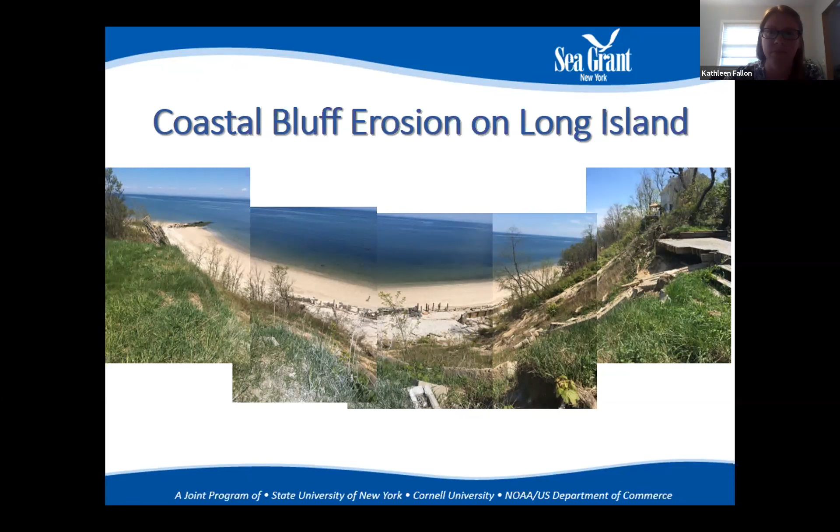Long Island is characterized by bluffs on the North Shore and in Montauk, and both are currently eroding at various rates. Along the North Shore, our bluff erosion tends to be episodic, happening at various rates usually related to storm events, whereas out in Montauk, where we have continuous wave action, the bluff erosion is a lot more continuous, going at different rates.

So there are things that we have done in order to prevent and mitigate bluff erosion. These two images show the plantings and terracing that has been done - these are more natural, nature-based features. In the first picture I showed you, you saw a bluff bulkhead at the toe of the bluff, so there are also more gray infrastructure options. However, we see here that even though you can put up measures to mitigate the erosion, if your neighboring properties are not protected, you might still wind up with issues. So bluff erosion and mitigation measures really need to be a continuous option.

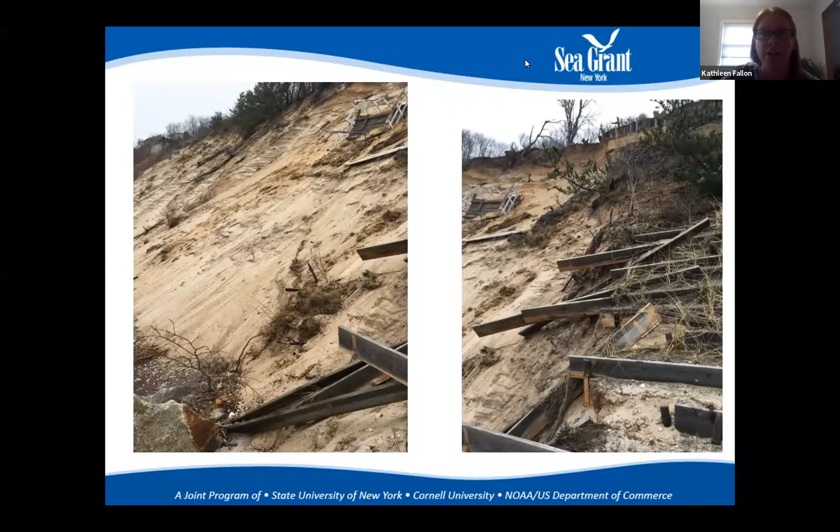And then I'm going to leave that there, and I'm going to let Roy take it over.

Sorry, I had to unmute there. Thank you, Kathleen. Can everyone see? Well, that's what we're trying to avoid. So can everybody see that? Yes, Roy, you're good.

In the Great Lakes, we have really similar issues to what you have down in Long Island. Unfortunately, it's not as predictable as the tides would make it out to be.

We have bluffs in pretty much every Great Lakes county to an extent. They're not the same bluffs in every county, and they tend to vary, especially on the eastern shore of Lake Ontario, or the eroding dunes along southern Jefferson County and Oswego County, Sandy Island Dune Complex, where we're seeing the most bluff erosion there right now. However, on the southern shore, we have significant truncated drumlins left over from the last glacial era in New York State, and we kind of see the alternating drumlin wetland complex throughout the area.

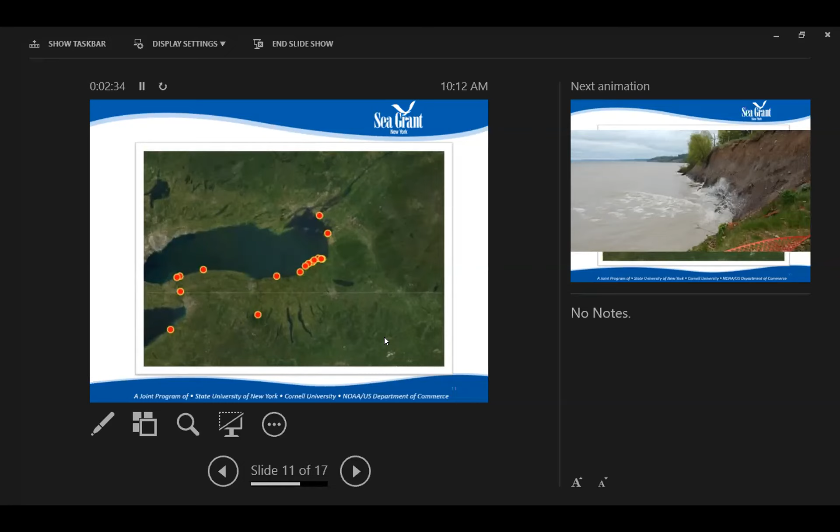And just recently, we've started getting more reports from Lake Erie because the lake levels just aren't going down to the point where people can do a lot of work on their properties.

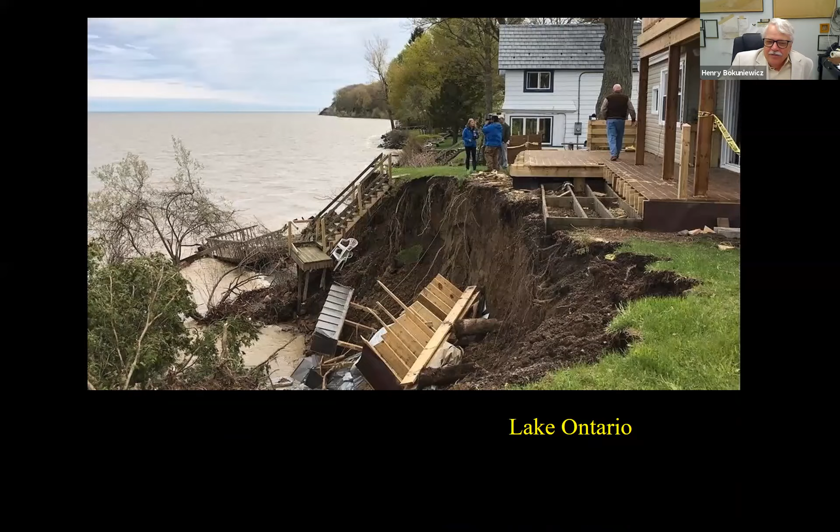The bluffs on the Great Lakes and around Long Island do look an awfully lot alike, and it's tempting to say that they're all the same, they're all pretty much similar. And it's even more tempting when the impacts are identical. You see this in the Great Lakes and you see this on Long Island. It doesn't take much imagination to relate the two in terms of the processes.

On the other hand, you also see things like this. These are the Chimney Bluffs in Lake Ontario, something that's very different, and makes you think, well, there's something unique going on here. Part of this is a problem in compositional material that forms the bluffs. On Long Island, many of the bluffs have a foundation of Cretaceous sand and gravel, very old material that has then been modified by the last glaciation. Around the Great Lakes, as Roy was saying, much of the loose material of the bluffs is composed entirely of glacial till, more recent material, different composition, and leads to a different behavior.

When Ali talks about the research, these compositional differences are one of the elements that we're trying to incorporate into our understanding of bluff erosion.

Regardless, the problem is very much the same, or can be viewed as the same. All of these sections of shoreline are subject to the Coastal Erosion Hazard Area line, in recognition by the state that these are hazardous locations where the state has some jurisdiction in regulating. So there's this similarity that extends across areas both in the Great Lakes and on Long Island.

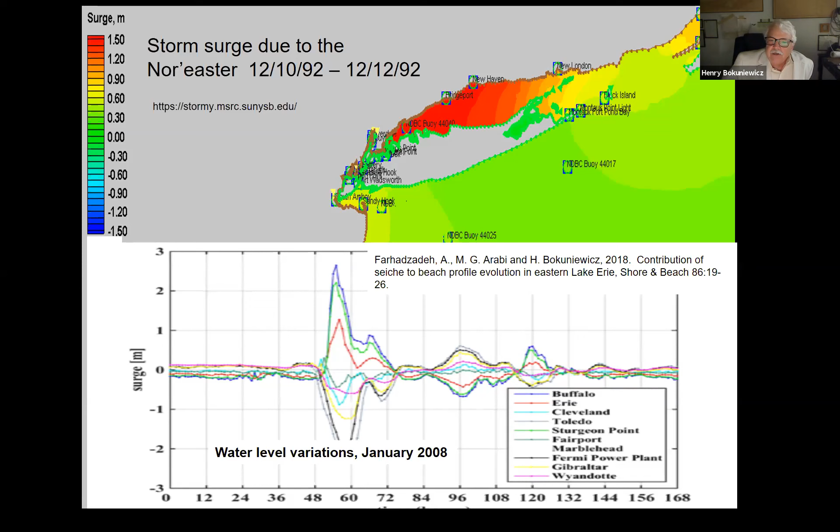On the Great Lakes, Ali has done some work on this, where the storms may not drive in ocean water like it does on Long Island Sound, but it tilts the water level and can raise it several meters on the coastline. In both cases, this drowns the beach and allows the bluffs to be attacked by waves.

In the Great Lakes, as Roy pointed out, there are similar sorts of changes due to water level fluctuations from precipitation and the input and output of water into the different lakes. Changes in lake level produce these long-term stresses on the system, which again can drown the beach, allow the waves to progress directly over the beach, and undermine the bluffs.

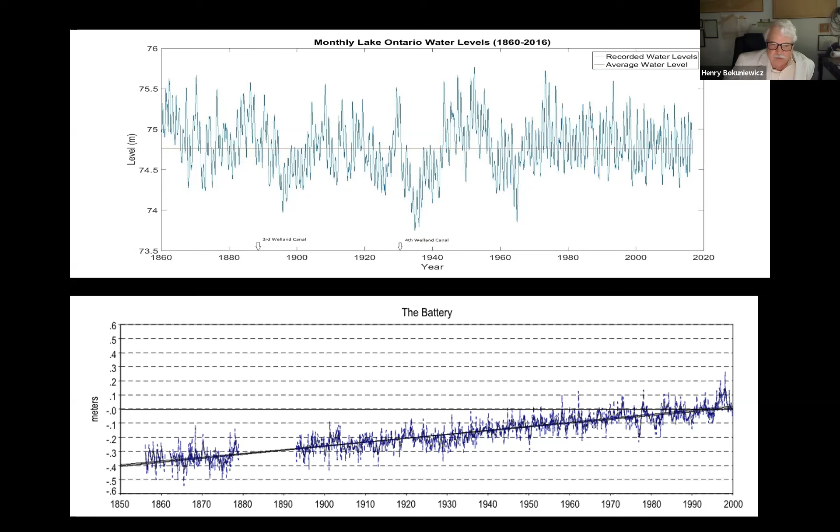Ali will talk more about the details of this process as we go further. But waves are the most likely suspects—we can see this happening. People who live along the shore can see this during a storm and have a good sense of how dangerous that wave attack can be. It's certainly one of the obvious and primary drivers of this.

But the waves have kind of a silent partner—something that aids and abets them, an invisible factor we don't really recognize, due to groundwater, or the subterranean water content of the bluff material. On Long Island and elsewhere, groundwater levels can actually undermine and sap the bluffs, weakening them even without the waves. The water content in the soil makes a difference as to how resilient or resistant it is to erosion and large-scale collapse.

So another element of the research project we're pursuing is to look at the influence of water as well as composition on the susceptibility of these coastal features to erosion.

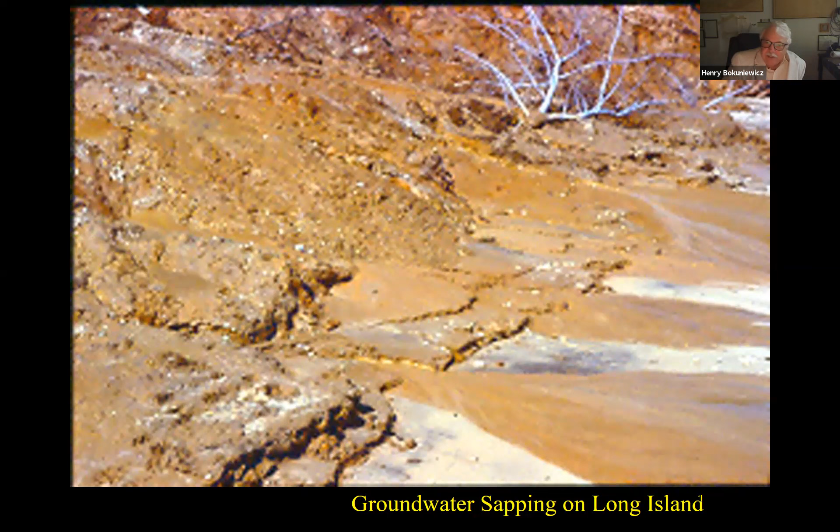With that introduction, I'm going to turn it over to Ali, who will give more details on what we're planning, what we've recently done, and what we're planning to do in the near future. Hopefully we can get some input as to how this relates to individual problems at sites around both the Great Lakes and Long Island, as well as common issues that plague these communities. So I'm going to stop there, and Ali, it's up to you.

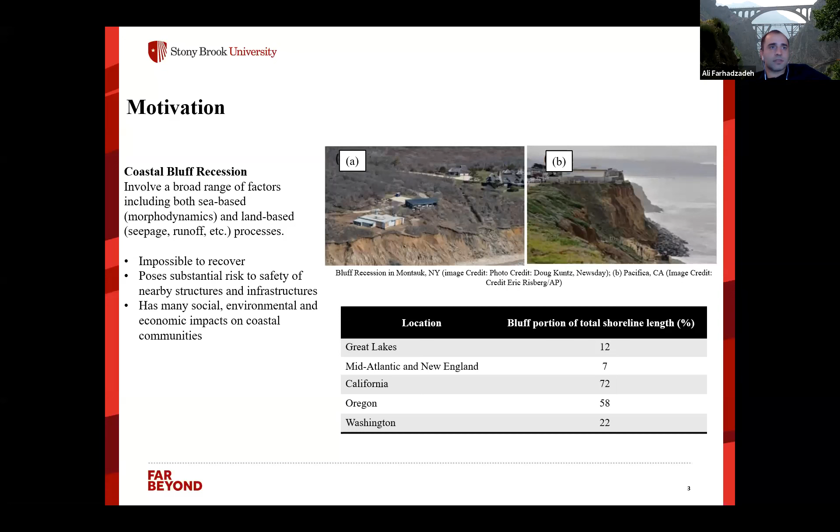Again, we are trying to understand, at least in part, what causes bluff erosion and how we can control it. We're not going to be able to stop it, but at least manage it.

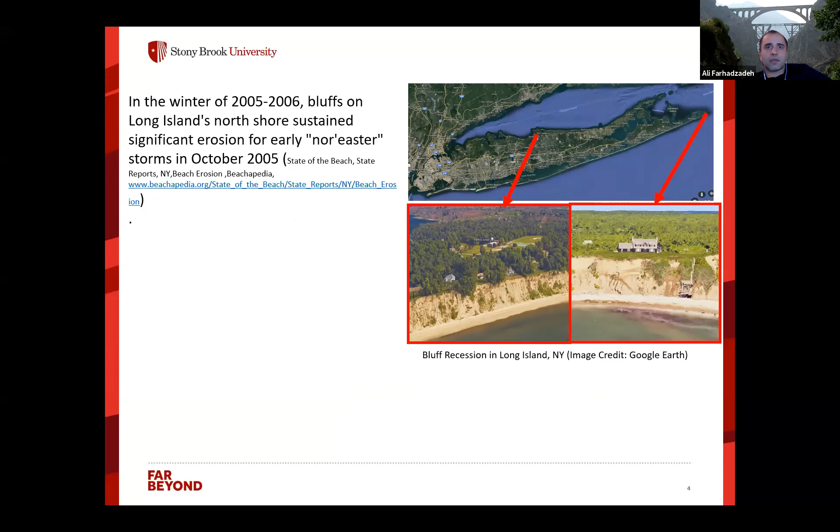There are a lot of reports out there on the erosion of bluffs in Long Island and in the Great Lakes. You can see some of the statistics here. I'm not going to go into that.

A video I found on YouTube, and I'm going to share it with you.

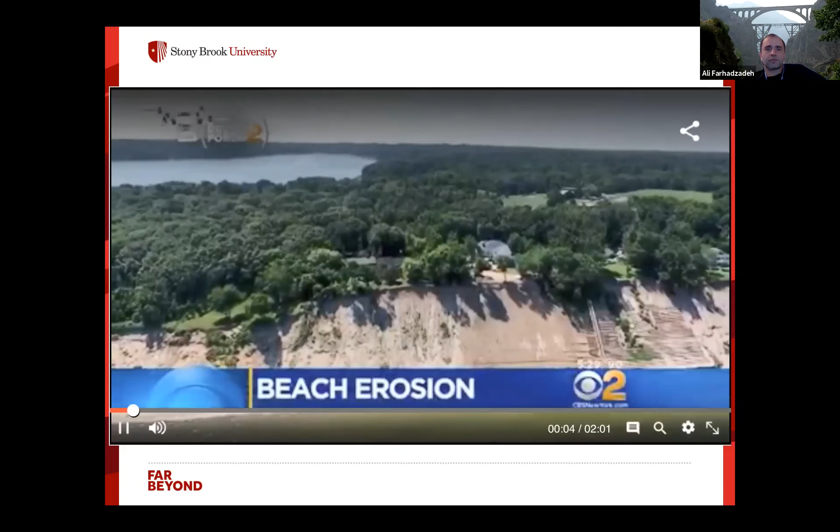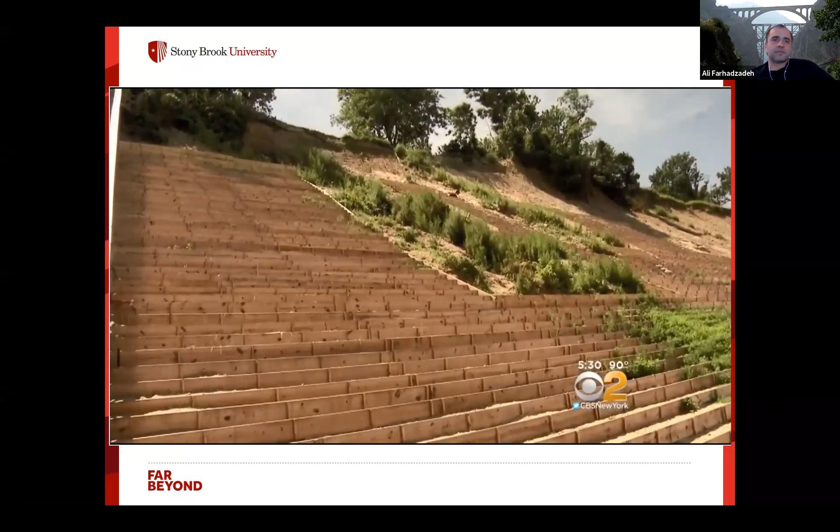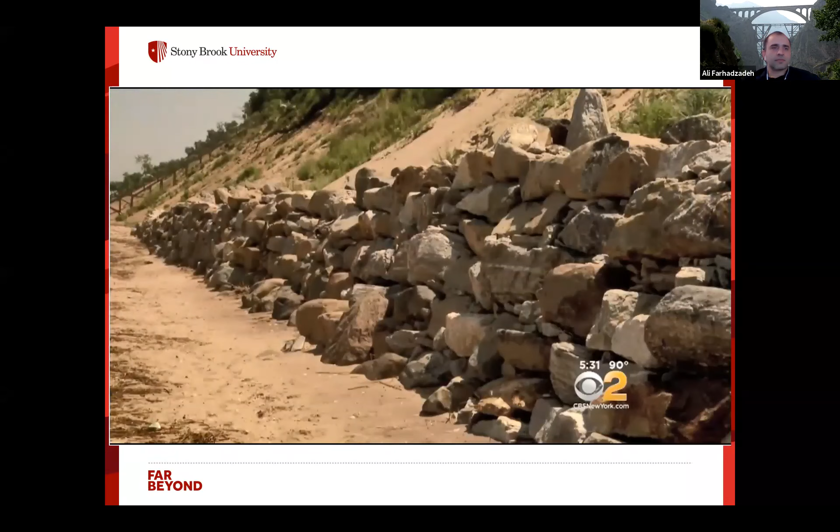Homes are breathtaking, a 100-foot straight drop to Long Island Sound. But the incline is getting more precarious. Peter Scott loses 2 feet of backyard to erosion every year. We should be allowed to build these walls. With DEC and village permission, he had this massive terraced wall built, footed with huge boulders to stave off erosion, protect his home and property. We should be able to protect it. We're not taking away from anybody. There's no way they can say that the beach is being destroyed by what we're doing. But down the block, this wall may have to come down. The owner did not get village approval first. It was an audacious act of unlawfulness. The violation adding fuel to an already heated issue. Some experts argue seawalls to shore up private homes and bluffs are thinning out public beaches downstream by interrupting the natural flow of sand. Nancy Featherston claims seawalls are making her community's private beach disappear. You will destroy the beaches. You're stopping the nourishment of sand that created them. The problem's not just here in Nissequogue. Across Suffolk County's North Shore, homes are in danger and beaches are being swallowed by dramatic erosion. A statewide master plan is not always implemented uniformly. As this home teeters on the cliffs, the owner, who declined comment, may now have to tear down this six-figure seawall. A Bluff Road neighbor's seawall is under construction. We're preserving the beach, we're preserving the coastline. If you go to Connecticut, it's all rock walls along the coast to protect it. 2.5-ton boulders may have to be moved or even removed. The village hasn't ruled yet. In Nissequogue, Long Island, Carolyn Gusoff, CBS 2 News. Now an attorney for the...

All right, so it looks like everybody's right, so we don't really know. But I think there's some truth to everybody's statement. The bluffs supply sediment to the beach, but there are also some hazards to the infrastructure that they need to worry about. So that's understandable.

On Long Island, most bluffs are mainly sandy with some silt and clay, typically around 70–80% sand, 20–30% fine grain material. On Great Lakes, we have mostly till bluffs with a bit of sand. So it's basically two ends of the spectrum in terms of composition, Long Island versus Great Lakes.

The forcing mechanism, as Henry mentioned, is different. The South Shore is different from the North Shore of Long Island, but in the Great Lakes, seiche, freeze and thaw, precipitation, and even ice impact are the main erosion drivers. Lake level is managed to some extent, but we've done work on seiche, and we see that if the trend of warmer winters continues with less ice coverage, for instance on Lake Erie, we expect more seiching and more erosion in the future.

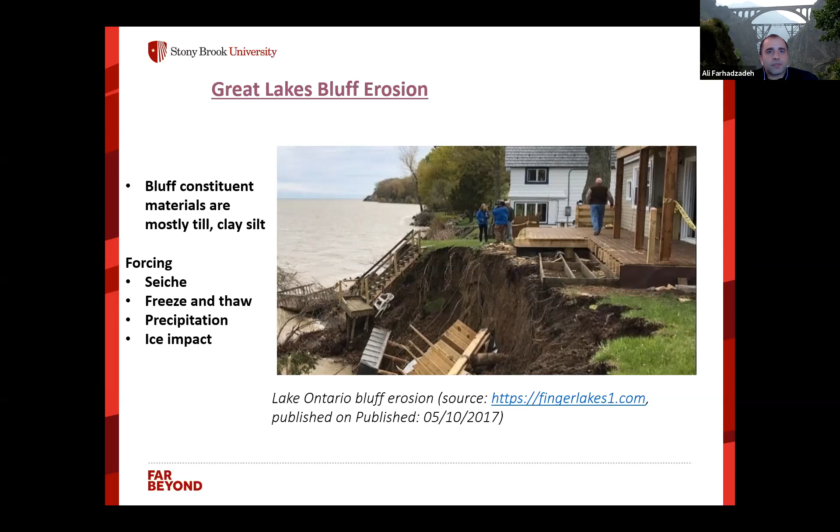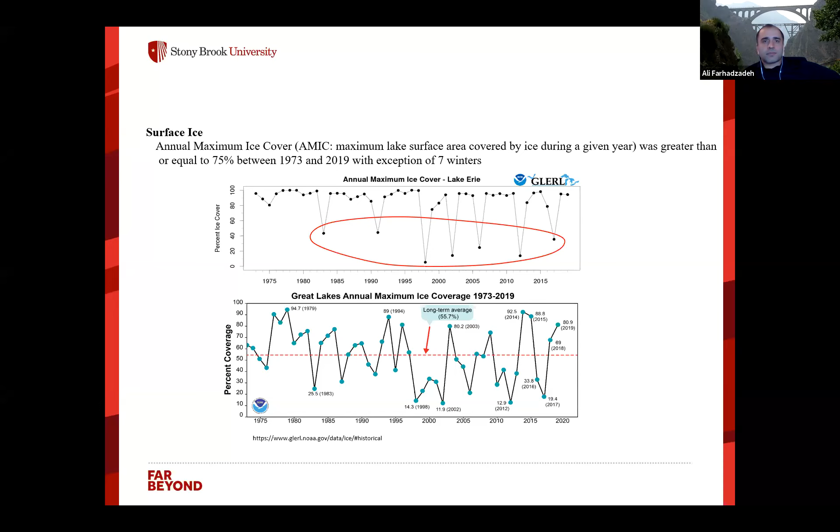I put that curve around those dots, showing that we've had more warm winters over the past 10 to 20 years, pretty much 15 years. We get warm winters more frequently now than in the past, which is going to exacerbate the seiche effect and erosion in the future.

Bluff erosion is a very complex process, as Henry rightfully mentioned. We have a bunch of processes together contributing to bluff erosion. We can categorize them into two main categories: land-based versus sea-based.

Sea-based basically involves wave and water level, which leads to wave impact, foreshore erosion, and so on. This happens in tandem with land-based processes like rainfall and seepage—basically any mechanism that weakens the soil and leads to it losing resistance and eventually failing.

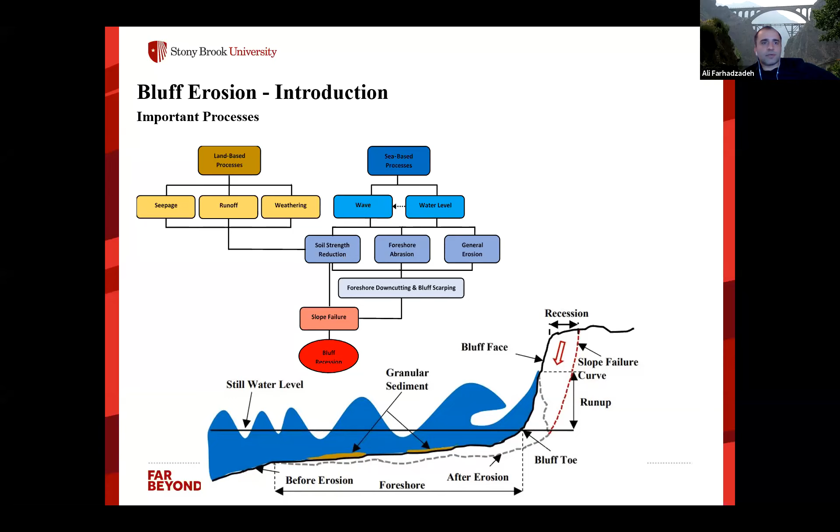Obviously, if you have seepage and runoff and so on, you're dealing with much weaker soil, and failure would happen much more easily than if the soil is strong.

Our goal was to try to understand the recession rate, or characterize the recession of the sloping beach and bluffs under wave and surge attack. We looked into three components: fine content—the composition of the soil, how much fine versus coarse material; the relative density—the looser or less compact soil compared to denser soil; and the role of water content.

Obviously, if you have more water in the soil, you get more pore pressure and less resistance. Our study in the past focused on the optimum water content and the dry side of the optimum water content. We're going to continue working on this with different rates of water content over the next two years.

To do that, we went to Montauk with my student. We collected sediment—we had a permit from the parks, thanks to them—but people still came up to us asking why we were destroying the bluffs. We said, no, we're not destroying it, we're trying to understand why erosion happens here.

It was kind of impressive—it shows that responsible citizens are also concerned, or maybe even more concerned than us, about bluff erosion and the health of the shoreline and beaches.

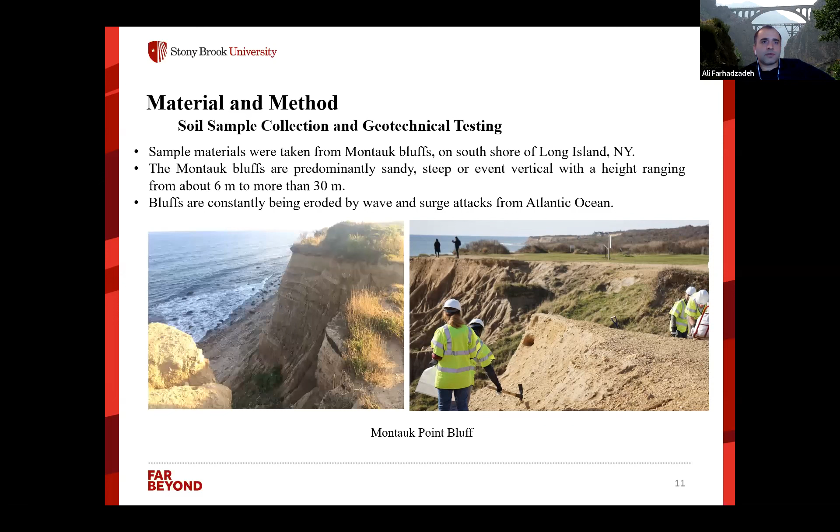We took samples, a few tons. We rented a U-Haul, collected sand in bags, and brought them to the lab, where we tried to characterize their soil mechanical properties.

Then, within these ranges, we tried to come up with controlled experiments with different fine contents: 0, 5. We basically reconstituted the original soil into 5 different soil compositions, 0, 5, 10, 15, and 20% fine material. The rest was basically sand.

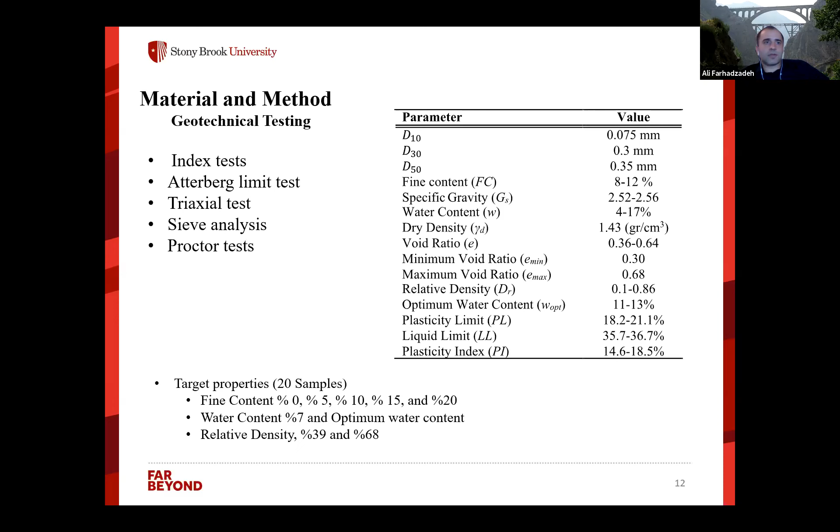We looked at 2 different water contents, 7% and the optimum water content, which was different for these 5 soil compositions. And we looked at 2 different relative densities, one on the looser side and one on the denser side, 39% relative density versus 68%. So basically the water content and the relative density represent the packing and how dense, or to some extent the consolidation. They're not exactly the same, but they may demonstrate similar behavior in terms of soil response to forcing.

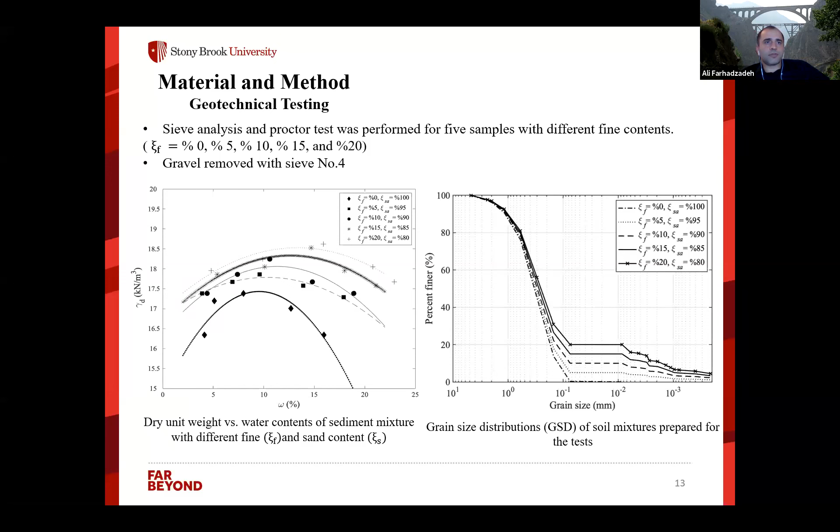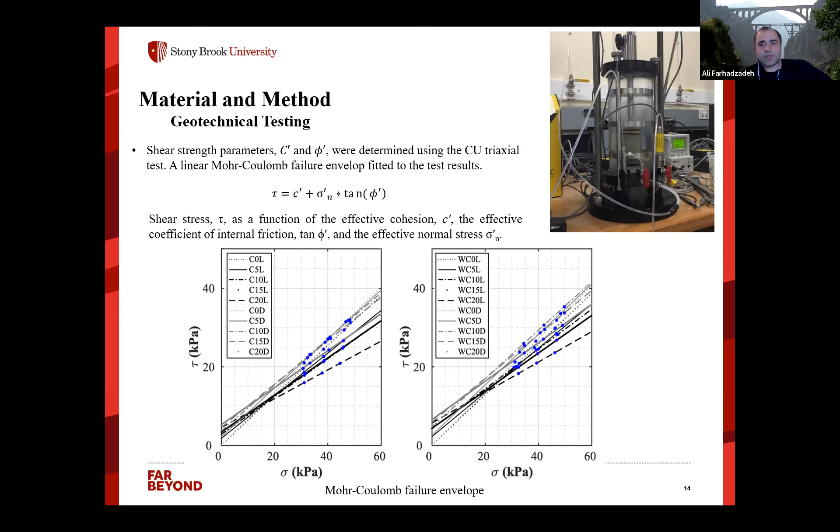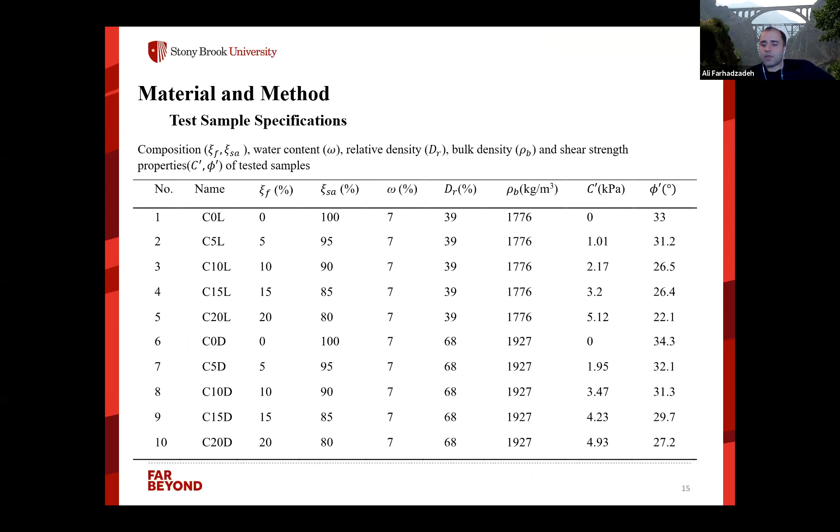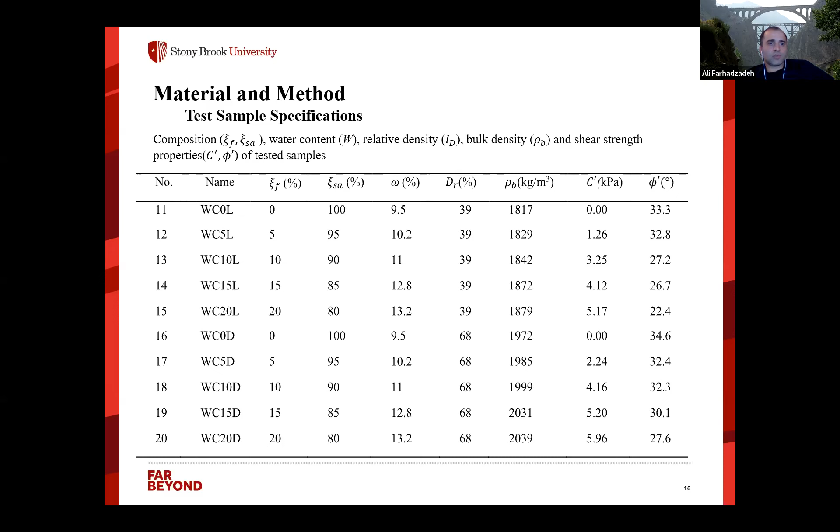So these are the properties of the 20 samples. Here is the first 10 samples, which were packed at the lower water content with 0, 5, 10, 15, 20% fine material, loose and dense, with the dry sample. The other set was packed at the optimum water content. So this basically summarizes the properties of the different soils that we tested in the lab.

We did some image processing to get the erosion. So what we did is we created this bluff in the lab, set the water level, and with the paddle we generated waves. Then we took videos of the bluff responses, erosion, and so on, and translated that into beach profile or bluff profile evolution in time, and spatial analysis as well.

Then we raised the water level to try to mimic the sea level rise or surge level impact on the bluff erosion. We ran the wave again for another 12 hours—each stage was 12 hours of wave impacting the bluff at a certain water level. Water level was then risen another step, another 12 hours, and then a third time, another 12 hours. So 36 hours of wave impacting the bluff was done for each of the 20 bluff samples.

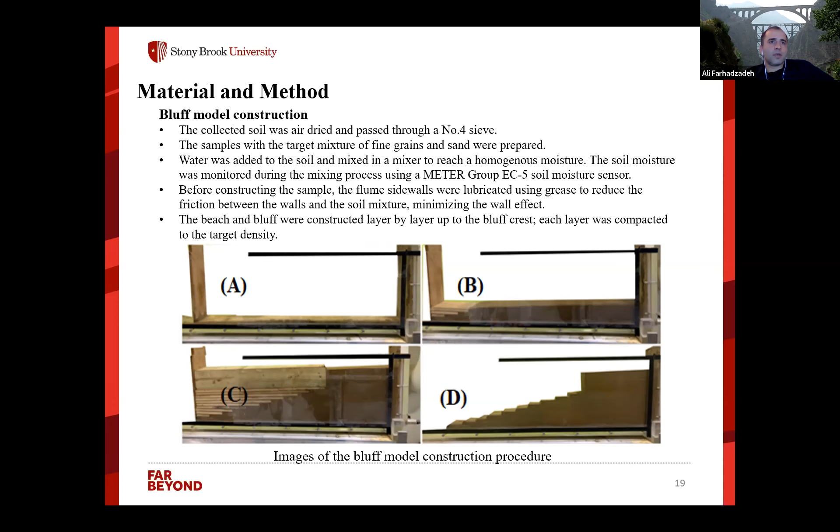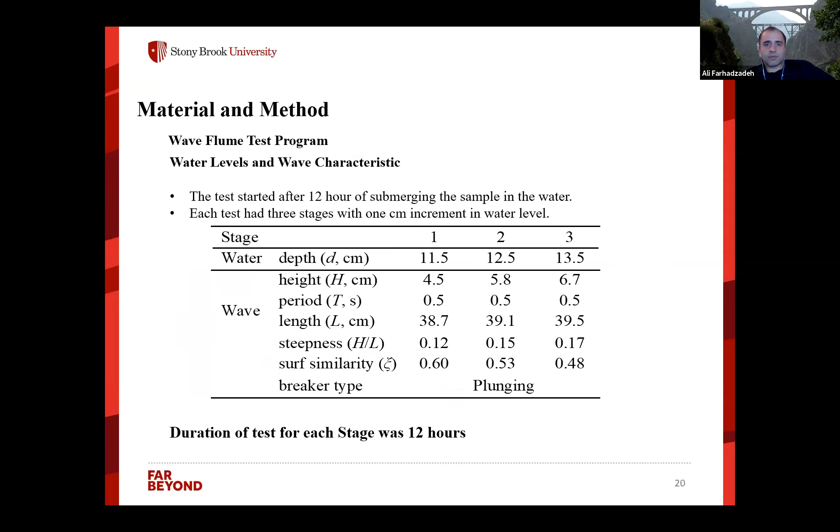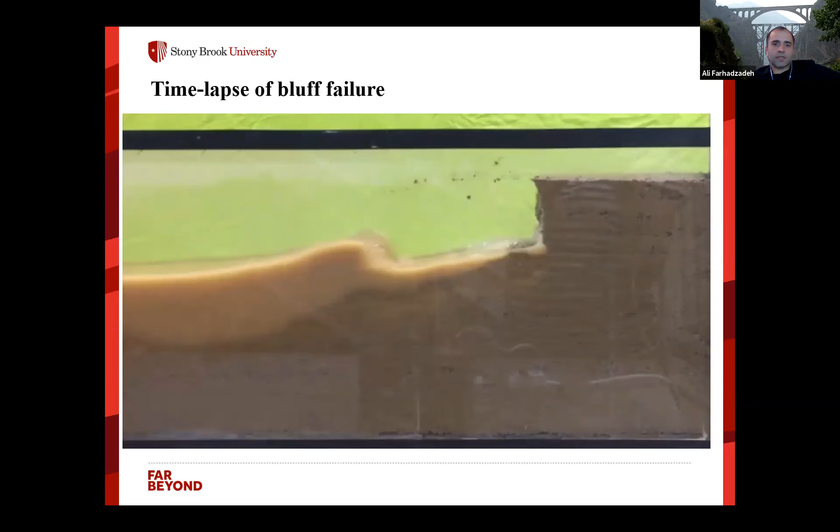And obviously it adds to the behavior of the wave, because now the wave breaks farther offshore since we have a shallower depth here. So I'm going to show it one more time.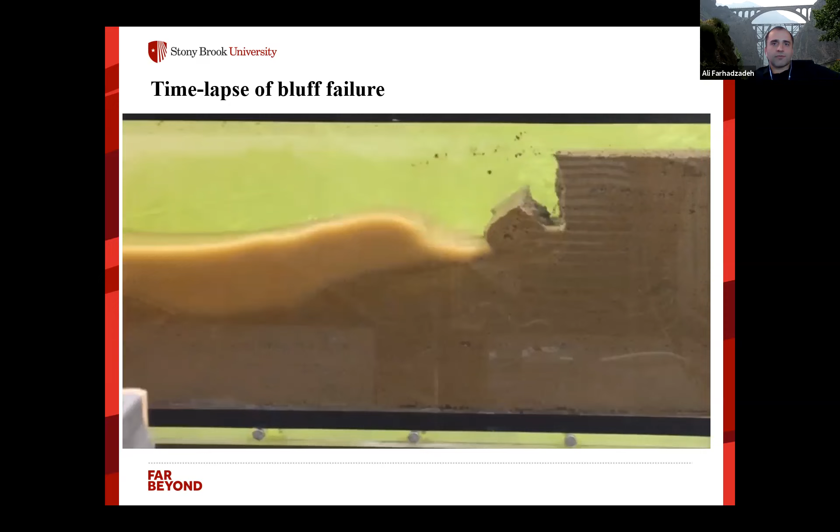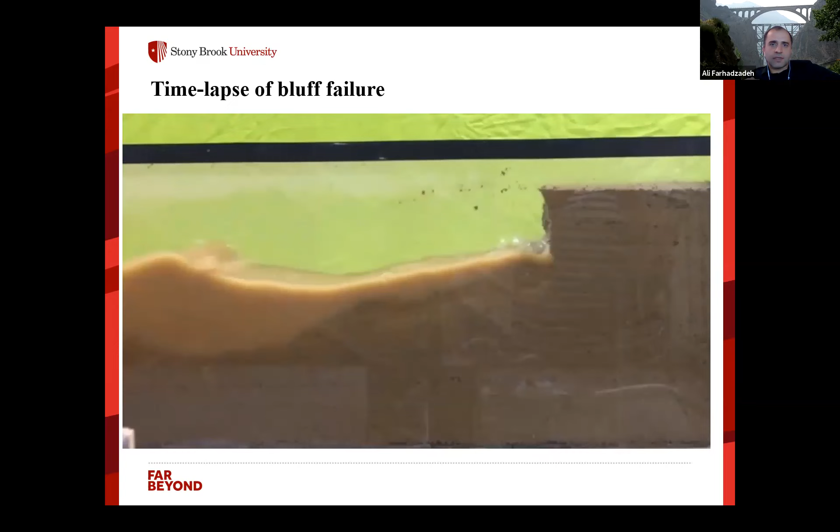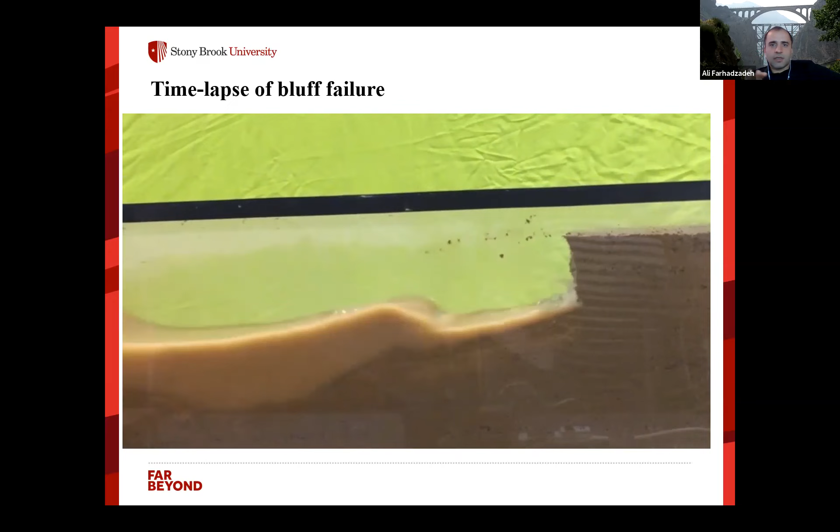So you just look at this migrating sand. What bluff failure does is it temporarily protects the shoreline, and it kind of balances the sand and calms down the sediment erosion processes for a while. Then nothing happens once you reach some sort of equilibrium situation. If I continue running this for another 40 hours, nothing is going to happen because it's an equilibrium situation.

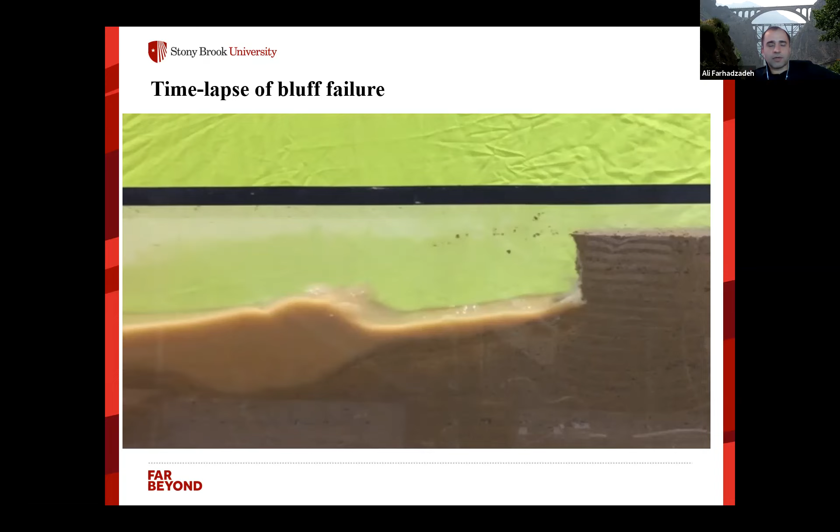But once I raise the water level or change the wave properties, another failure is going to happen. So it's a kind of episodic process. It doesn't happen, and then all of a sudden you have a lot of sand supply to the beach. But the point is, if nothing happens on the land side in terms of sand or the bluff strength, the material strength, and if you don't have a lot of precipitation, and we only continue with the same type of wave and water level forcing, the bluff is not going to fail. But once there's a change, something triggers, like water level rises or wave height increases, then you're going to have bluff erosion and failure.

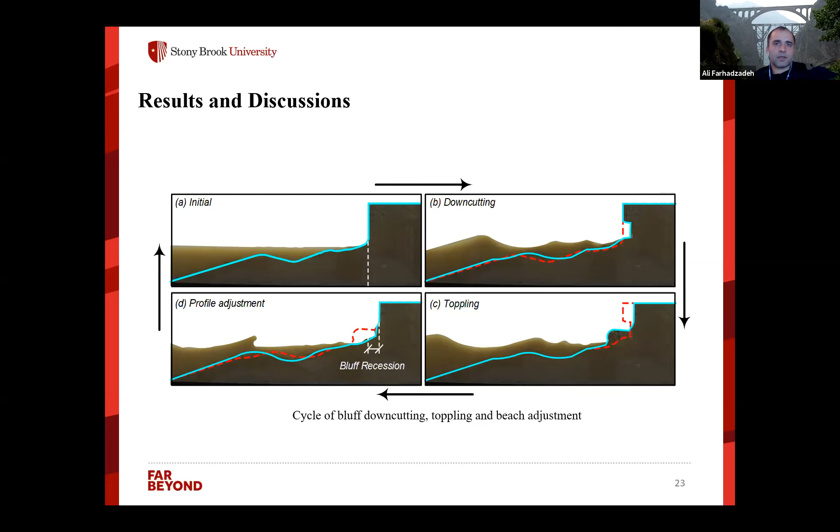So this is again the process that I just discussed. Initially, you have a bluff like this. Everything is in equilibrium. Then you rise the water level. It starts creating a notch, and then this notch fails, and the sediment is going to migrate offshore. You have a new equilibrium beach profile now, and then nothing happens until you change something in terms of water level or wave forcing, and then we have another cycle. So this cycle continues on and on, depending on the change in the wave and water level forcing.

Some of the results you see here at different stages, we had different failures, but if I can summarize this: once you go toward more clay materials, or even denser material, the bluff erosion is going to be significantly reduced. And what we found is the composition is important, but more important than composition is the density of the soil. If you're exposing a much denser soil to the same forcing as a looser soil, even if the looser soil has more clay content, the denser sandy soil is going to be more resistive in terms of erosion.

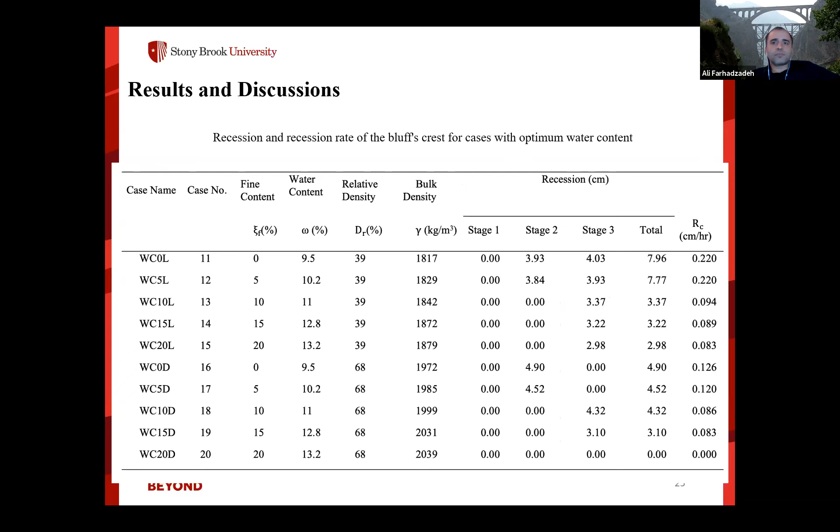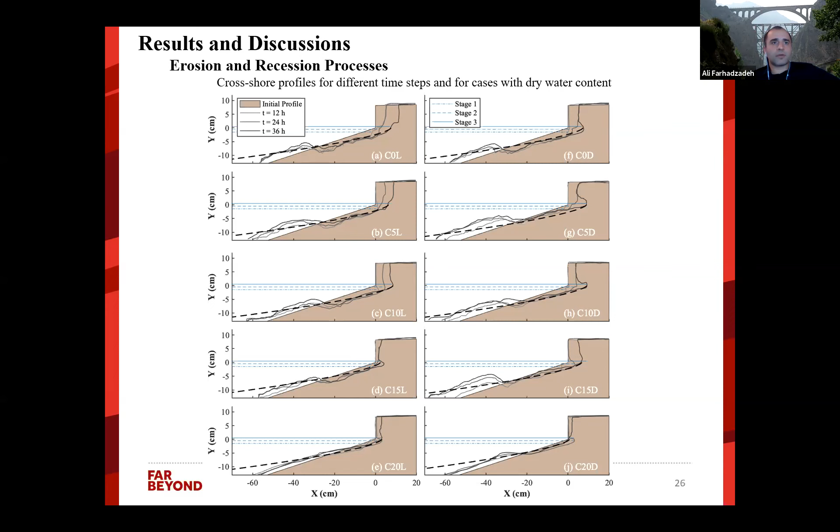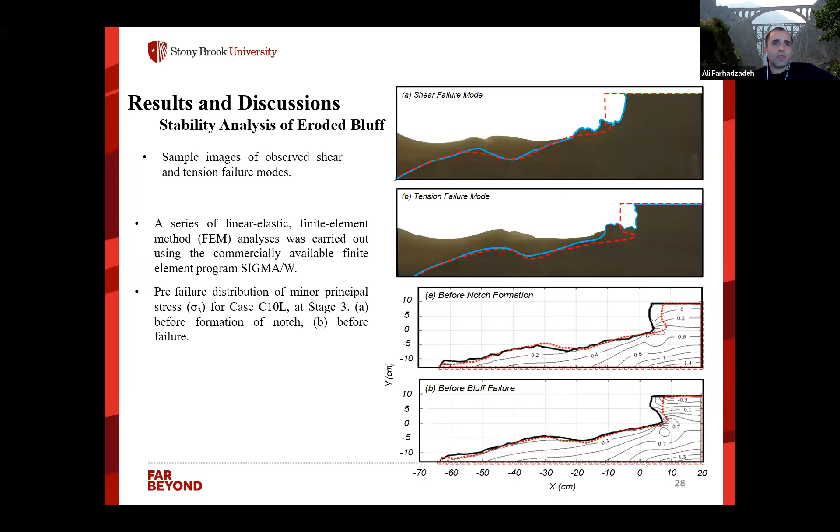The rate of recession, we found how it relates to this Greek letter xi, which is basically the amount of fine material in the soil, and dr is the relative density, and omega is the water content. So different parameters play different roles, but our model looks pretty good in terms of comparison with the measurement. That was, I think, kind of impressive.

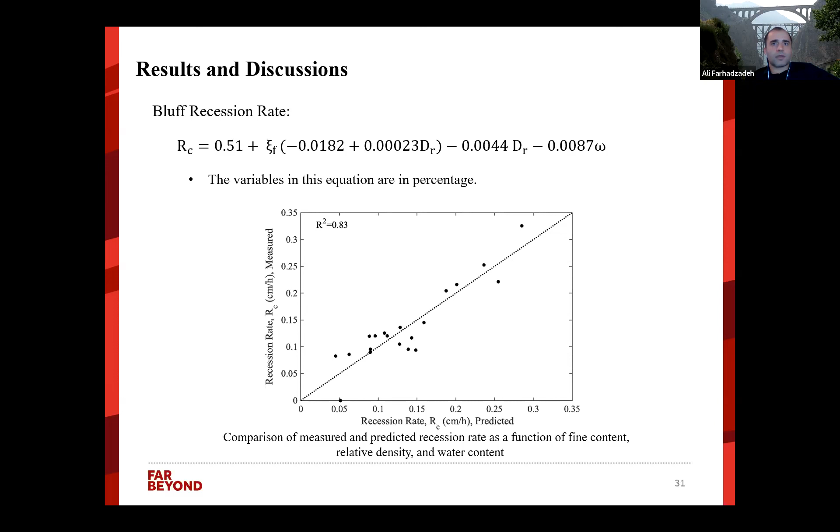Some of the conclusions we have: erosion of beach and bluff with looser soil and fine content less than 10% - we had 2 bluff failures. Once we had denser soil and more fine content, we had only 1 failure. So more fine content and denser soil significantly reduces the chance of bluff failure. The bluff recession rate decreased as the fine content and density of the soil increased.

The effect of fine material in reducing recession was more pronounced once we had looser soil versus denser soil - the amount of fine content became more important when the density was low. But once the density of the sand was high, adding more fine content didn't change the behavior of the soil much. For all cases, the optimum water content - the water content that gives you more packing - significantly reduces recession compared to a bluff that is more dry.

We're going to look at the wet bluff scenario, like when we have huge precipitation and a lot of runoff, which takes the soil above the optimal water content in terms of water content. We're going to look at it in the next year or so.

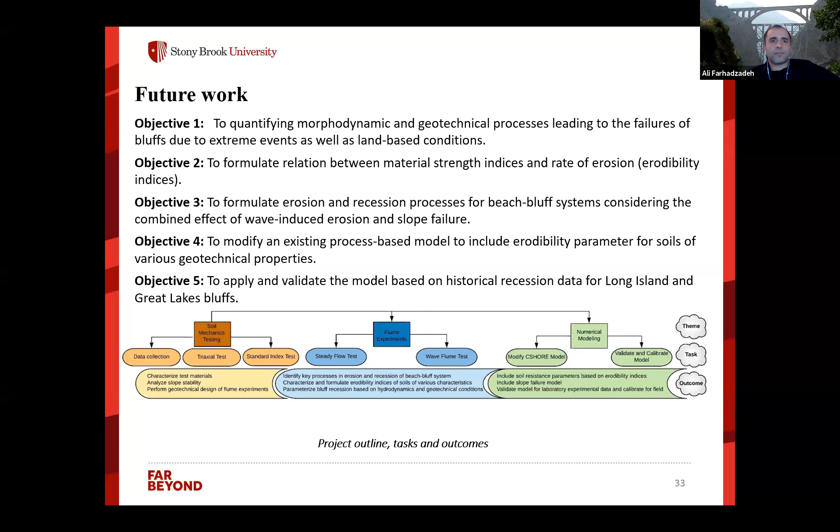For doing the soil property and erodibility analysis, we're going to look into different sites, Long Island and Great Lakes. We're going to take samples from different sites and do the analysis, trying to look at both the type of soil and bluff.

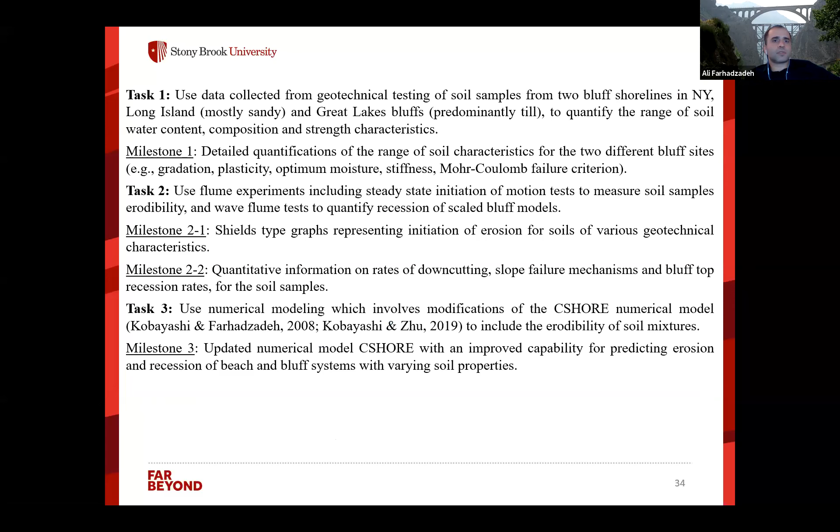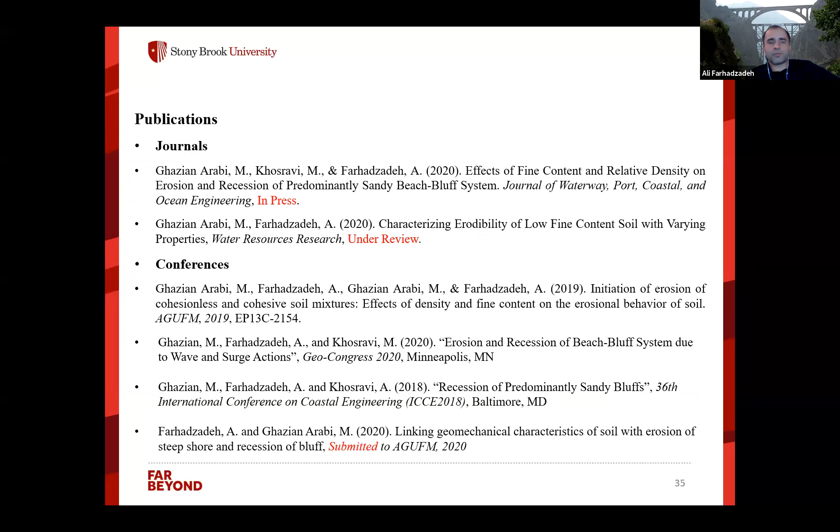Again, that's pretty much what I just discussed. These are some of the publications we had, and we're still working on more publications. Hopefully with the new research in the next 2 years we'll have more to present next time, but we're happy to answer any questions.

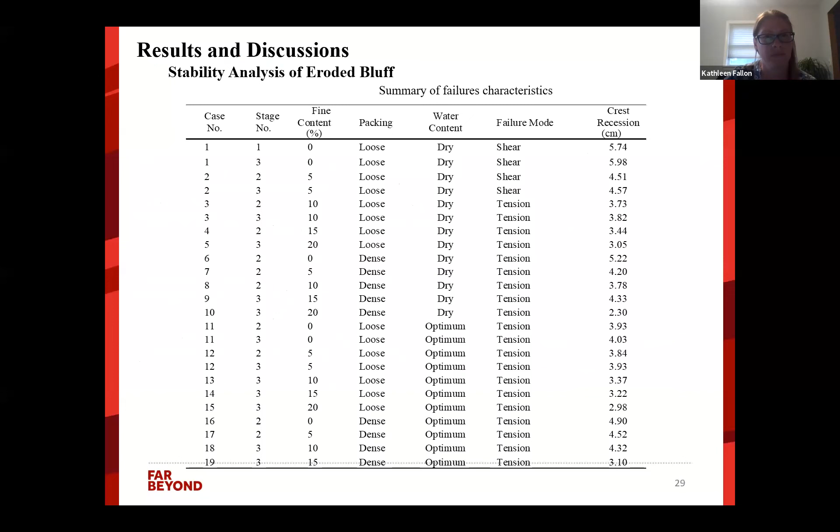Thank you. Ali, can you go back to the slides on erodibility indices? Is it these indices? I'm not sure exactly which slide it is, but try.

The question is: will this be in the form of a mapping product? If not, what are the potential applied results?

Our hope is to develop this into an advanced numerical model, because right now the model isn't capable of predicting bluff erosion. It's designed for sandy beaches, dunes, and those kinds of beach features. But if we're able to enhance the model for this kind of application, it could be used for practical purposes.

The CSHORE model we're trying to develop or enhance is already approved and funded by the Army Corps. When I was working on a FEMA project, we used it to map Great Lakes flooding and shore erosion, but we didn't include bluff erosion — we treated it like sand dunes.

But once you enhance the model to predict bluff erosion, you can apply it to improve flood map production or other design applications. That's our hope.

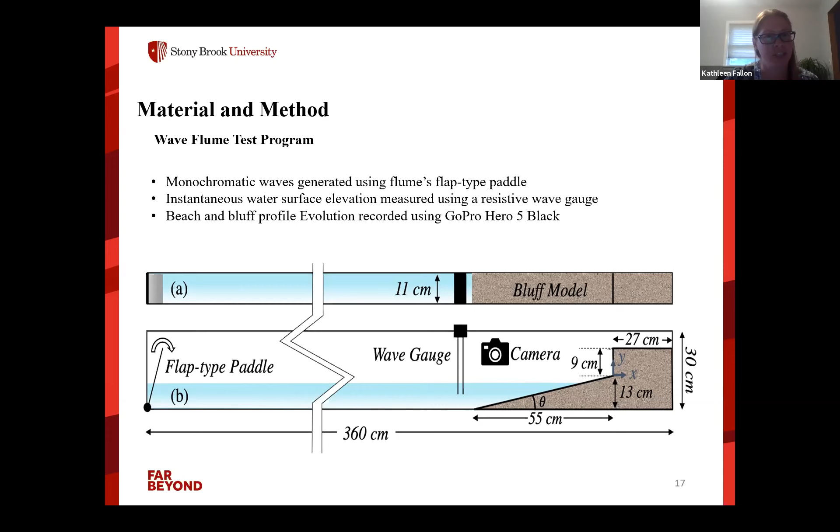Moving to the next question: to what extent will your research consider the extent to which neighboring properties are hardened, possibly altering the wave climate on the bluff you are modeling? Yeah, we can do that.

Right now the model has the capability to let you put in a seawall and see how it impacts the neighboring property. But everything as of now is based on sand and sandy material. That can be done — you can harden the beach and look at the neighboring property. Right now you can do it even without the bluff component, but if we add that, it could be applicable to bluff shorelines as well.

Tom would like to know if the use of snow fence and vegetation, such as American beach grass, would be helpful at the toe to mitigate erosion.

Good question. There's a lot of discussion about living shorelines. I'm not a believer in that, to be honest — not because I'm against environmental approaches, but because those methods aren't mature enough. I'm an engineer, so I like to build things and harden the beaches.

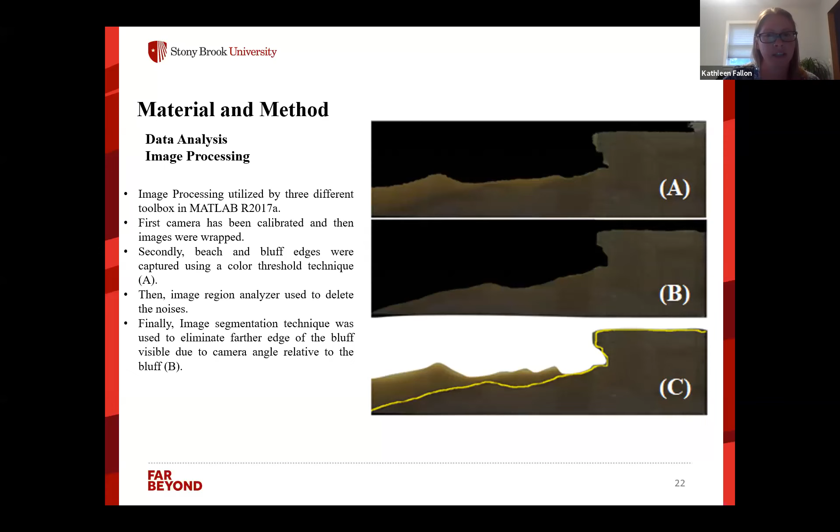Moving on, this wave impact in your wave tanks, Ali, appears to be perpendicular to the shoreline.

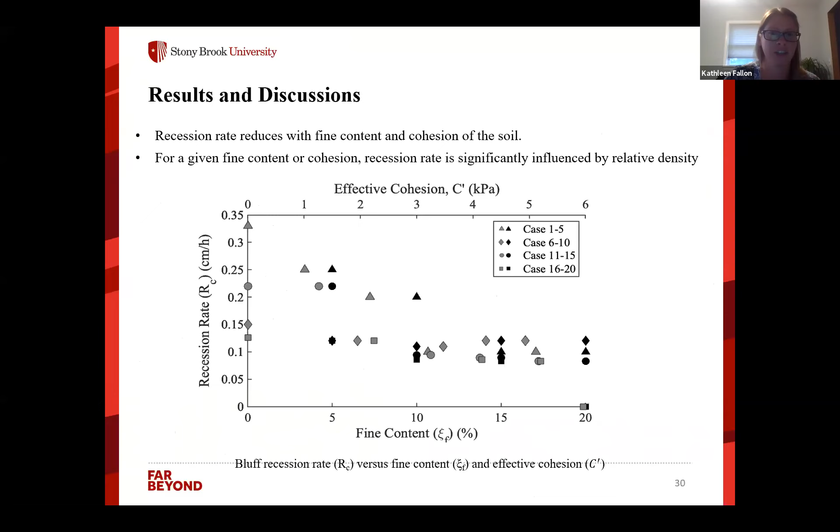That's right, a majority of wave impacts are angular to one degree or another. Would that be a potential major driver of bluff base removal? And is there a range of wave angular impacts that produce greater erosive forcing?

In coastal engineering, we know that once the wave comes from a 45-degree angle, you have a much stronger alongshore current, which exacerbates the erosion. But in this particular case, we actually looked into the more extreme situation - a kind of head-on impact, where the wave comes and directly impacts the bluff. In real life, you often have waves coming obliquely, more at an angle, so you don't have that kind of high run-up, which appears to be the main driver of notch formation.

If the wave comes with an angle, the run-up is going to be lower and the notch is going to be smaller. Also the flow velocity that causes erosion at the toe is going to be less. But you would have longshore sediment transport, and it could impact the neighboring or downdrift bluffs as well. But yes, that's an important point to be considered.

Thanks, Ali. Aaron would like to know what erosion control solutions will be revealed as the result of your research. Will these be solutions for individual parcels or only for regional large-scale projects?

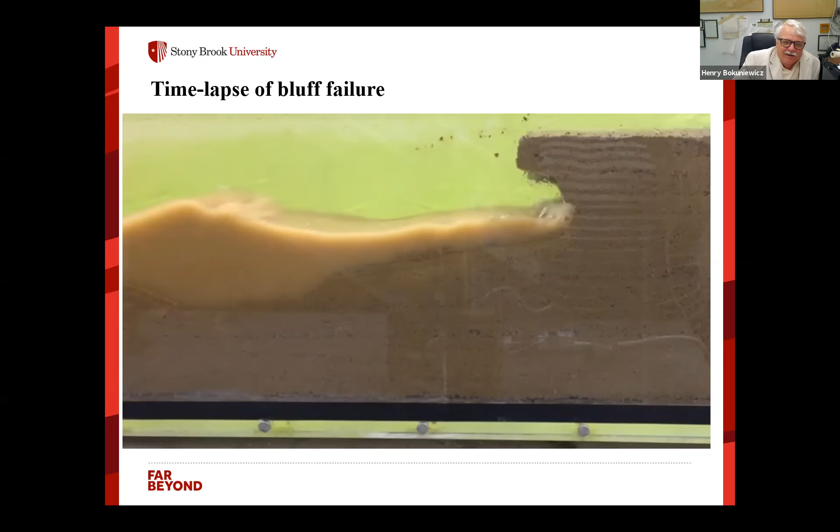So in general, any attempt to reduce that energy is going to be beneficial. A lot depends on how much it costs you, how often it has to be replaced, and these sorts of things. To add to what Henry mentioned, offshore breakwaters are probably good for places such as Long Island Sound.

Where the waves are small and high frequency, because those are more effective for that kind of environment. If you build such a structure, you see that in the Caribbean they build a lot of offshore breakwater because the waves are not that strong. The beaches are very shallow.

But if you build those kind of structures on, for instance, the South Shore, and on top of it you have sea level rise, those structures become basically useless over time. The revetments and the breakwaters, those kind of structures work pretty well in terms of dissipating wave energy.

But the issue is that kind of approach should be done at the regional level. Again, if you just protect your own property with rocks and breakwater, over the course of time, if the neighboring land recedes, those structures are going to be falling apart and dislodged. The rocks are going to be dislodged, and then after a while they deteriorate. So they're good in the short run, but not in the long run. It has to be done on a regional or community scale rather than just the personal level.

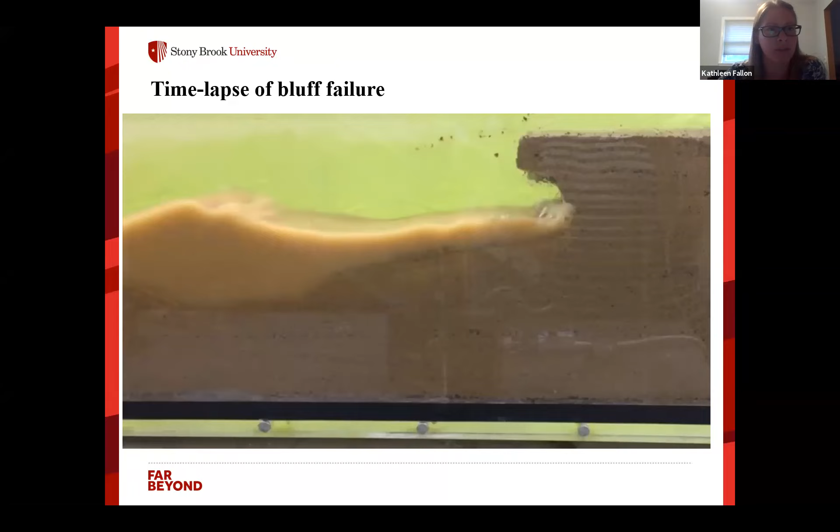Thank you. So Matthew would like to know, how does your numerical model correlate with the Army Corps sediment budget tool? And as a follow-up for the person that asked the previous question, does the Army Corps tool include Eastern Lake Ontario? Well, the Army Corps tool, that was my question toward me, right? Yes. Okay.

Yeah, the Army Corps tool is just software, and what you have to do is give it the shoreline profile, whatever it is. Doesn't matter whether it's a particular location in Long Island or on the West Coast, and then you provide it with the offshore wave and water level conditions. That information could come from buoys and gauges operated by NOAA, or through some regional numerical model, which is being done on a daily basis by NOAA and other government agencies. So it's software that you could apply anywhere, regardless of geographical location.